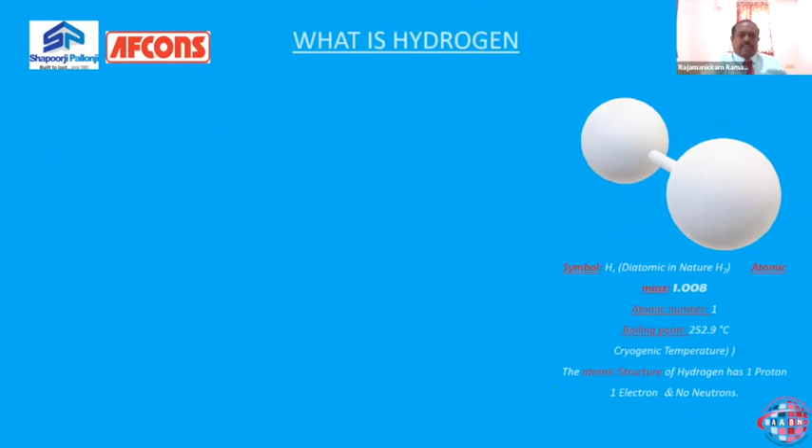If you look at it, hydrogen is a colorless, odorless, tasteless, non-toxic, and highly combustible gas. Being colorless, it is a little bit dangerous - it's not seen by the naked eye. It will escape during leakage paths, but we won't be noticing. And sometimes with the blue flame, even the flame is not visible. It is odorless, totally tasteless, and non-toxic, but it is a highly combustible gas. So that is the risk associated with hydrogen.

Basically, the sun is a giant ball of hydrogen, and H2 is the lightest element on Earth. About 11 liters of hydrogen gas weighs only 1 gram, and needs 11 cubic meters of volume for 1 kg of hydrogen gas - that's the density basically. It has high energy content, 120 megajoules per kg. The energy content is high by weight, but by volume it is low because it is less dense. Per kilogram of hydrogen gives 33.33 kilowatt hours, which is a unit of electrical power - so 33 or 34 units of power can be derived from 1 kg of hydrogen.

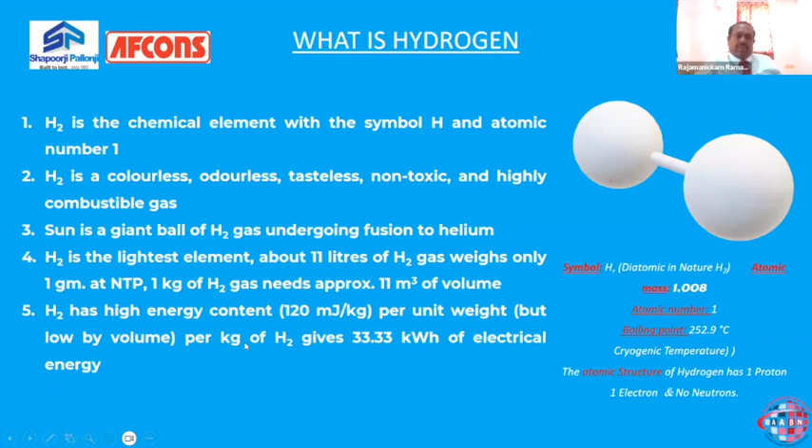So now we come to the topic after getting the properties: why hydrogen fuel? Everybody is talking about hydrogen now. They are all talking about renewable energies, and hydrogen occupies a very important position in the renewable source now.

Hydrogen has no direct carbon dioxide emission because the element hydrogen doesn't contain carbon, or any other greenhouse gases it emits, except some traces of nitrous oxide (NOx) which may be emitted, and that is due to heating of air, not inherent. No carbon dioxide is burnt, only hydrogen - it is a clean fuel. That is why the reason for us to go to hydrogen is it doesn't emit any gases which are harmful to the environment, including greenhouse gases.

Greenhouse gases are those gases like nitrous oxide, NOx, carbon dioxide, water vapor, and these gases absorb the heat radiation from Earth and remain in the atmosphere, increasing the atmospheric temperature. So the Earth's atmosphere is getting warmer day by day due to these greenhouse gases emitted by our usage - industrial use, vehicular transport, shipping transport, train - everything emits from fossil fuels.

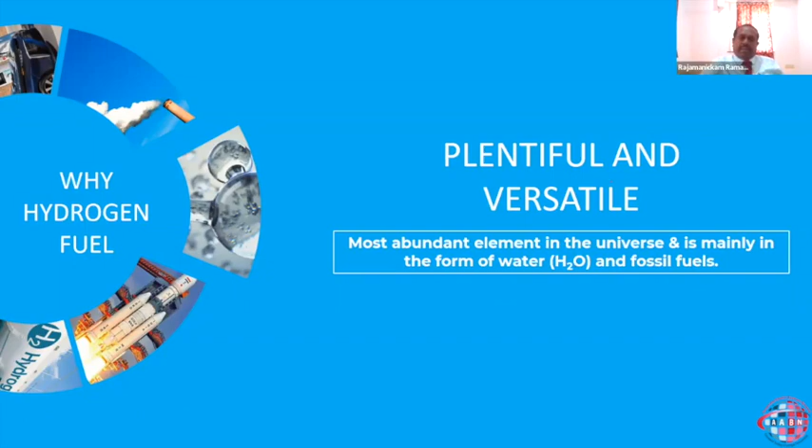Hydrogen is plentifully available on Earth, mainly in the form of water, and it is abundant in fossil fuels also. So it is because of plenty availability that we prefer hydrogen fuel.

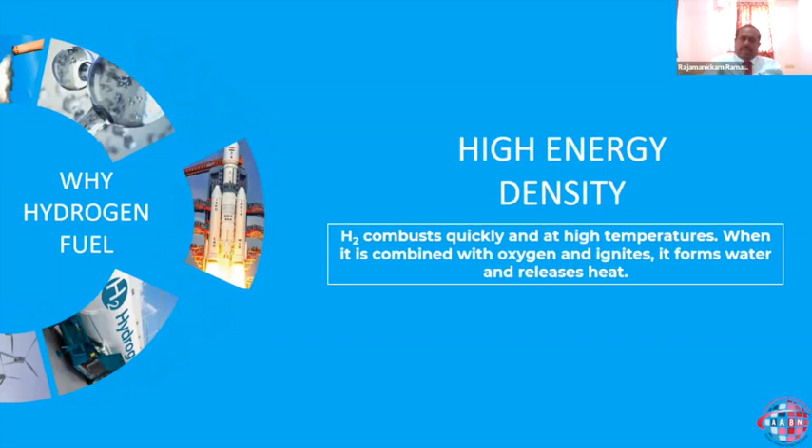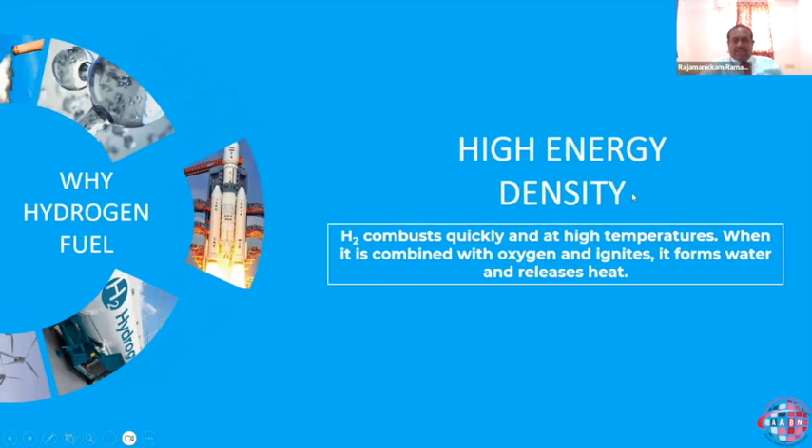It also has high energy density. When it ignites with oxygen, it forms water and releases heat. The energy density is high with respect to mass, but not with respect to volume.

Hydrogen can be produced and stored, but used anywhere, and no extended use is expected. You can use it any time, store it as long as you want. Not like electrical energies - when a windmill is running, you have to tie to the grid for usage, or you have to store it in batteries, so the efficiency reduces. In hydrogen it is not the case - storage can be done. It can be stored for long periods without any significant losses.

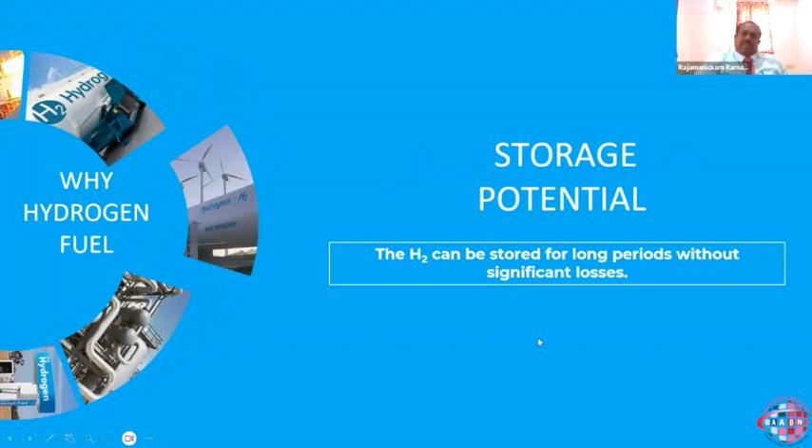It is an industrial fuel. Many industrial processes use fossil fuels and develop carbon dioxide, emitting greenhouse gases. So to replace them, hydrogen is the clean fuel which can be used.

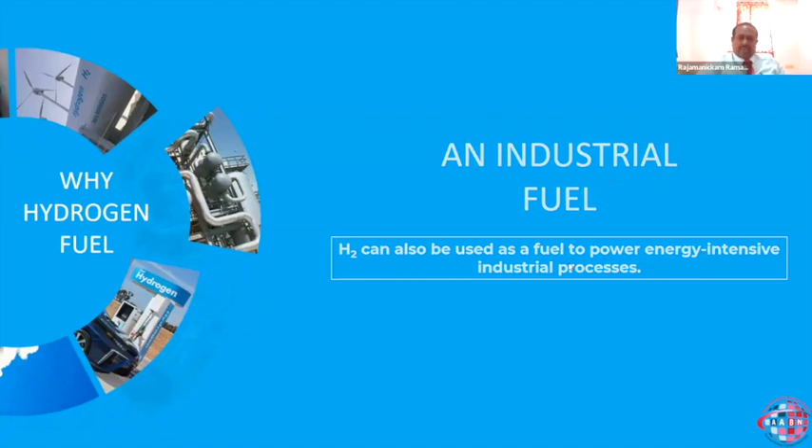Now the fossil fuel reserves in the world are depleting day by day. Saudi Arabia has one of the largest reserves, even they are getting depleted. Many reservoirs in Malaysia have already been closed, and of course many reservoirs are being discovered also. So it is because of the diminishing storage of fossil fuels on earth, we still need to find a way to run our business on earth.

So we need another alternate energy. Hydrogen seems to be a promising energy of the future. Coal as well as natural gas - all these supplies are fossil fuels, and they are getting depleted.

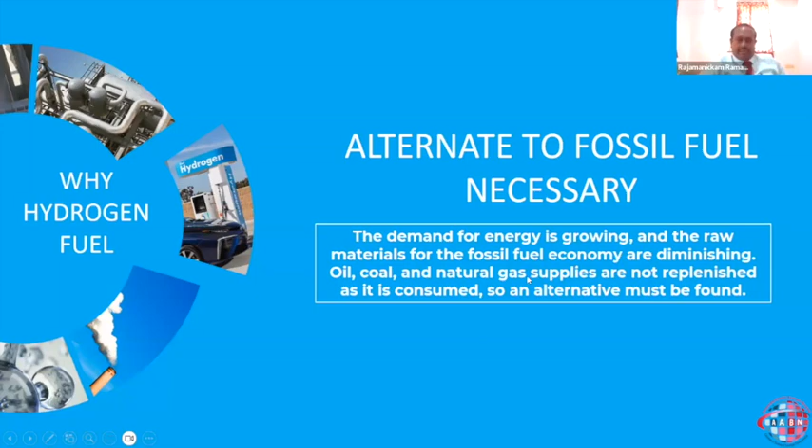Now, the reason for me to say why we go for hydrogen - we have seen some certain factors why we need to go into hydrogen energy. Now there is another big reason why we are going in.

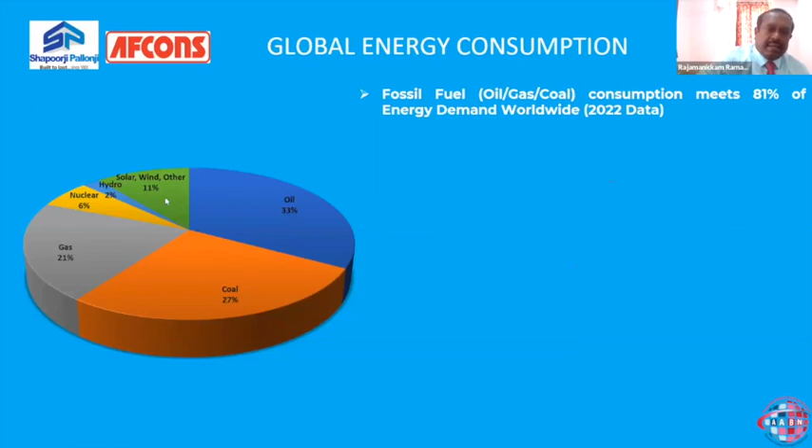If you consider fossil fuel consumption, it goes up to 81% of the world's energy demand worldwide. This is 2022 data from IEA. Other renewable sources only meet 11%.

Fossil fuels are also not a clean fuel, and they induce global warming, glaciers melt, so many issues come. The hydropower from dams provides only 2% of the energy demand. It is the most cleanest energy.

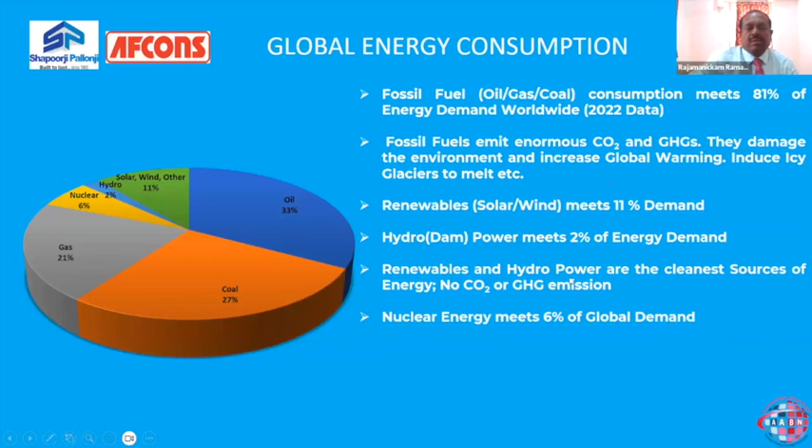And other renewable sources are also there - in renewables we have solar, wind, as well as hydropower. We have nuclear power also, which meets 6% of the global demand. Nuclear energy is clean from carbon dioxide or most of the GHGs, but it produces a lot of radioactive waste that is toxic to humans and harmful to them for more than thousands of years.

Basically, in the world, no country has made an innovation yet to break this silence on how to manage the radioactive waste. They have been dumping it by drilling into the earth too long and then dumping and sealing it, but nobody knows what really we can do. Research is still ongoing on the nuclear energy path.

And why we may not be able to go for solar also sometimes is because we need a bigger land area - like 2.3 to 2.5 acres required to generate 1 megawatt of solar power. These challenges in solar power are still there. Research is ongoing to improve the efficiency of solar power extraction.

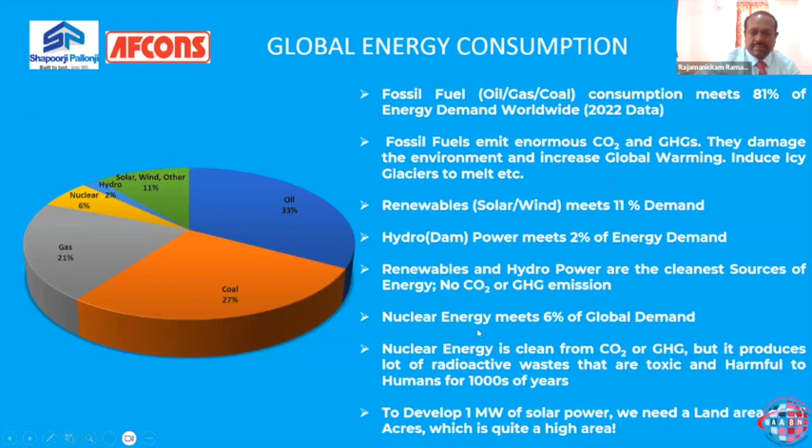So another reason for us why we are going for hydrogen power is the Paris Agreement. Global warming happened, and the climatic change conference happened in Paris in 2015. At the end of the conference, they drafted a legally binding international treaty that applies to almost all nations of the world, around 196 nations. What they say is all nations pledge to reduce carbon and greenhouse gas emissions so that we hold the increase in global average temperature to well below 2 degrees above the pre-industrial levels.

Pre-industrial levels are defined from 1850 to 1900 AD, the period where industrialization had not started. The global nations have to keep the global average temperature well below 2 degrees of the pre-industrial level, and pursue efforts to limit the temperature further to lie below 1.5 degrees. This 1.5 is an ambition, but the requirement is 2 degrees for any nation. With this stringent condition, it is difficult to continue with fossil fuel emissions.

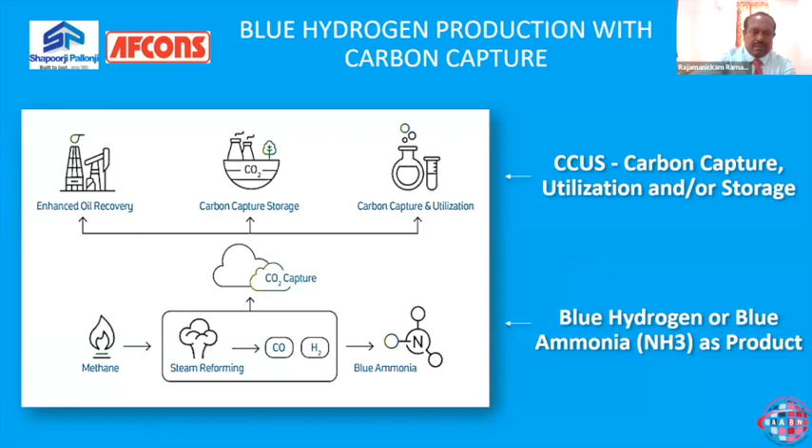Blue hydrogen can also be used to produce blue ammonia. Ammonia is made of three hydrogen atoms, NH3, so it requires a lot of hydrogen. These are the blue hydrogen technologies under development in the Gulf.

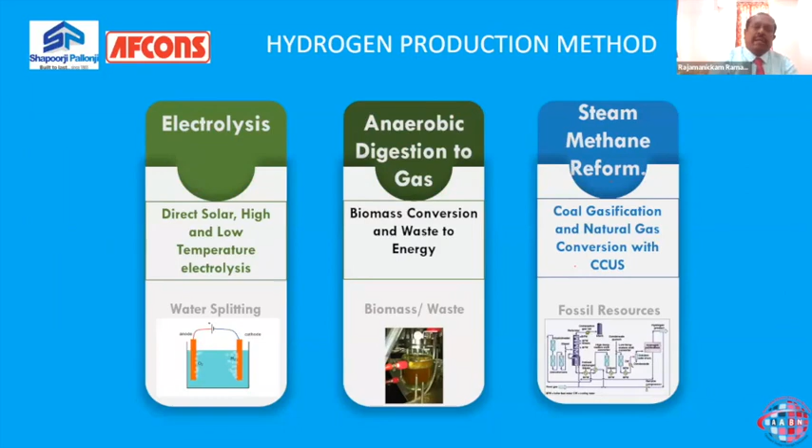So the different methods of producing hydrogen are written here. Hydrogen production mainly is done in the world most popularly by means of the steam reforming method - the highest amount of hydrogen is produced by steam reforming. Then you have coal gasification also, then electrolysis, which is now gaining more momentum. Green hydrogen comes from electrolysis because it doesn't emit any carbon dioxide.

So it is pure. We also have another kind of green case - biomass waste is utilized, burnt, and natural gas produced from it is called renewable natural gas, RNG. RNG is again converted using the steam reform method into hydrogen. For conversion of biomass, we may use anaerobic digestion, where bacteria that don't see oxygen at all, in a covered environment, break down the organic compounds of biomass into natural gas.

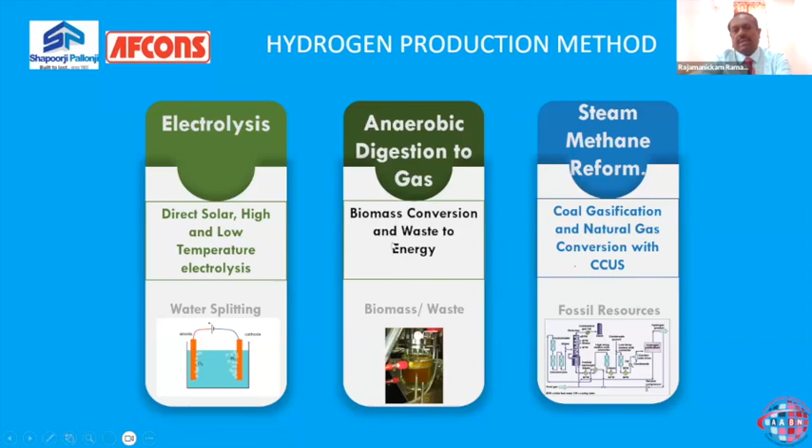So the main method of hydrogen production for green hydrogen is the electrolytic method—just the simple electrolysis process we have studied in chemistry.

There are two elements called anode and cathode. The anode is the positively charged terminal, and the cathode is the negative terminal. A membrane separates them, which can be an ion conducting media, and the electrolyte is also an ion conducting electrolyte—the solution you can see there.

Mostly the solution is salt water or some other acid. What they use mostly is salt, NaOH, a 30% solution also being used. So this electrolyte conducts the ions through the membrane.

When we pass electricity from a renewable source like wind power or solar power, then it is called green hydrogen—that's what we have seen earlier. So green hydrogen production is from a renewable source like wind or solar power. You need a power supply in this electrolysis process, and that power supply should come from solar or wind; then it is called green hydrogen. With that, you generate green hydrogen using an electrolytic cell like this.

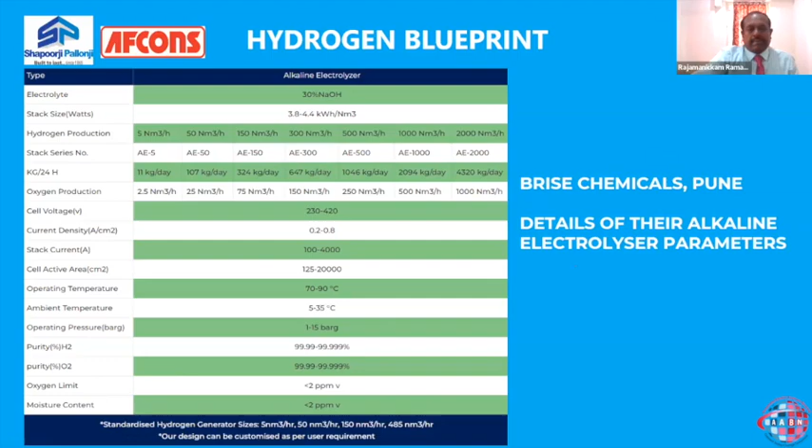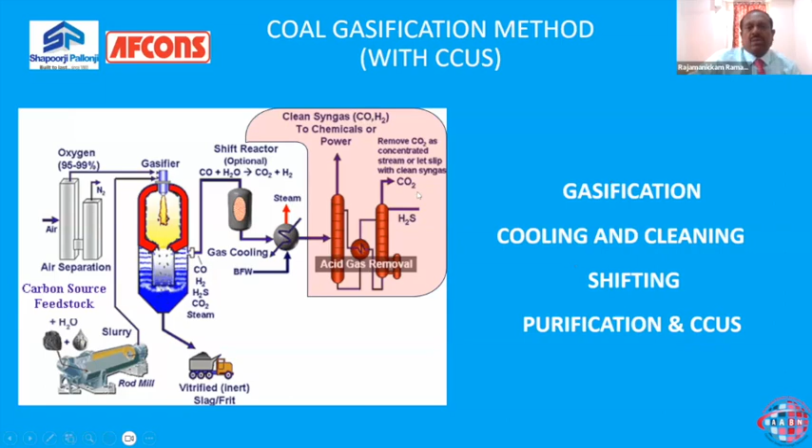It's called PSA in chemical terms. With pressure swing adsorption, basically a solid carbon powder like activated carbon, they pass the gas through it, and it removes the carbon dioxide. That is separately separated out and removed as part of CCUS. Unless CCUS is done, the hydrogen produced from this process is not termed blue hydrogen—it will be either gray, black, or brown. That is why we need to do carbon capture and storage safely; then the hydrogen is classified as blue hydrogen. Basically, we are trying to prevent the environment from carbon getting diffused into it, because carbon is harmful to the environment.

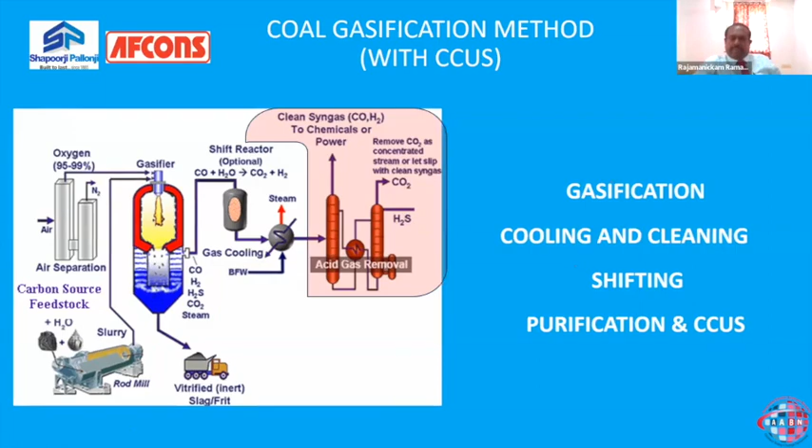So the second method is the steam methane reforming method. Here, methane gas from natural gas, mainly comprising methane, is passed into a cylinder wherein steam is also injected. With the steam and methane together, the reaction is endothermic, meaning it absorbs heat for the reaction to proceed. So reactant becomes product through assistance of heat, and we supply heat through steam, producing carbon monoxide and hydrogen, as in coal gasification.

Then the second part of the reaction is called the water gas shift reaction, wherein the carbon monoxide product is treated with hot steam, and it separates into carbon dioxide and hydrogen, also emitting a small amount of heat. So this reaction is exothermic because it emits heat. This is the process of the steam reforming method.

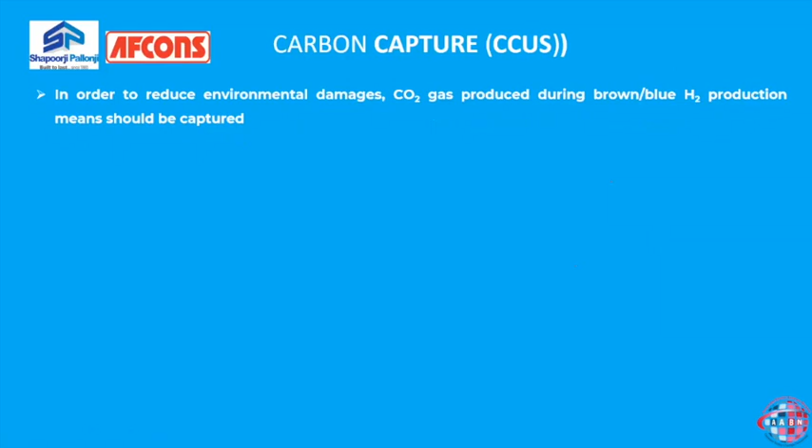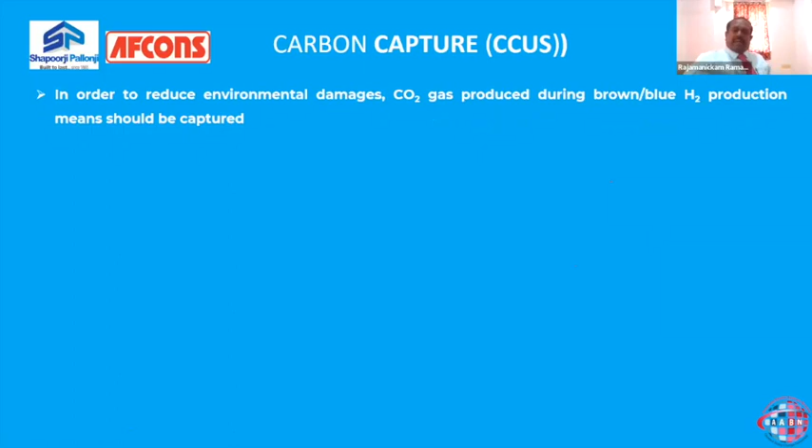So next is carbon capture, what we have been talking about, CCUS. In order to reduce environmental damage to the atmosphere, carbon dioxide gas produced during blue or brown hydrogen production has to be captured. And how do we capture it? There are two methods: you can either utilize the carbon dioxide, or you can capture it in drums and later store it into reservoirs. We will see about such a detailed method shortly.

There is a method of utilizing the carbon dioxide also. Many companies started researching how to utilize the carbon dioxide produced. Basically, they are trying to form carbon-based products, building materials, chemicals, etc. Many research institutes and companies like Saudi Aramco are in a big way trying to utilize the carbon instantly rather than storing it.

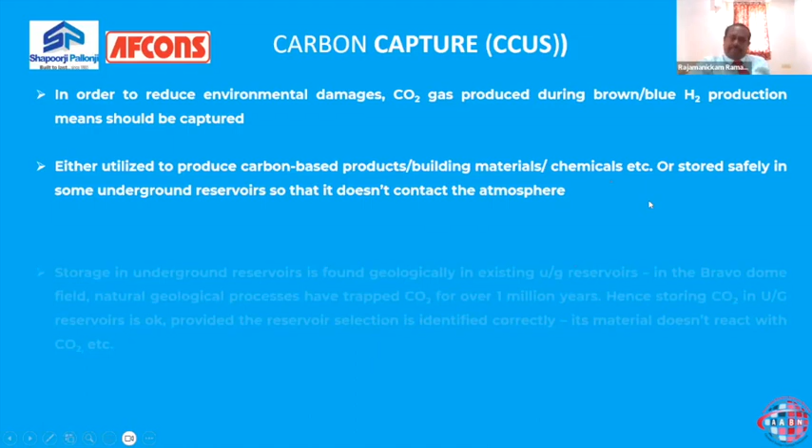So carbon dioxide can also be stored safely in underground reservoirs so that it doesn't come in contact with the atmosphere. We will see that later. Storage in underground reservoirs is found geologically existing. There is already carbon dioxide naturally occurring under the reservoirs below Earth. The rock traps the carbon dioxide in the geological condition below Earth, and it is already existing naturally.

This phenomenon gives rise to researchers thinking that the extra carbon dioxide produced from all these processes can be injected into a geological formation, a reservoir, and sealed so that it is safe for the environment, as well as satisfying nature, because naturally occurring carbon dioxide is already found trapped below reservoirs for over 1 million years. For example, the Bravo Dome field in the US, where natural geological processes have trapped carbon dioxide for over 1 million years already. So it is not new that we are trying to inject carbon dioxide into the ground; it is already a natural process that exists.

So whatever carbon dioxide we produce from all these hydrogen making processes, we can think of injecting it into such reservoirs in big volumes. Because if you store carbon in containers, think how many containers you need and the energy required to produce them, and so much cost is involved. Whereas you simply drive it into the earth and trap it into the reservoir, seal it, and you must have a framework to monitor and control them. Reservoir control management should be there.

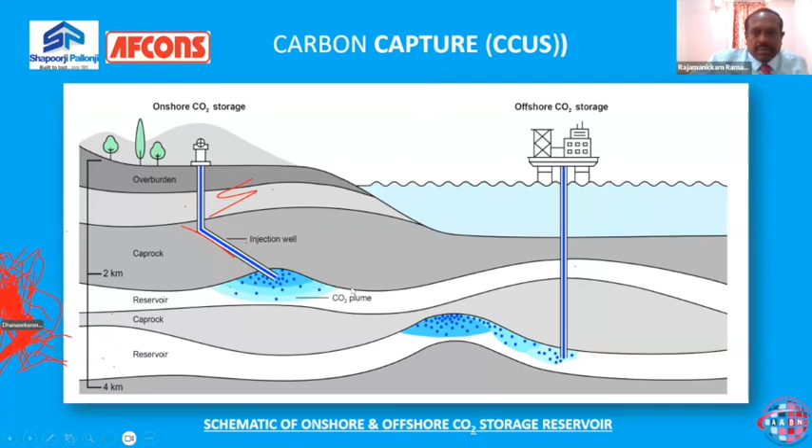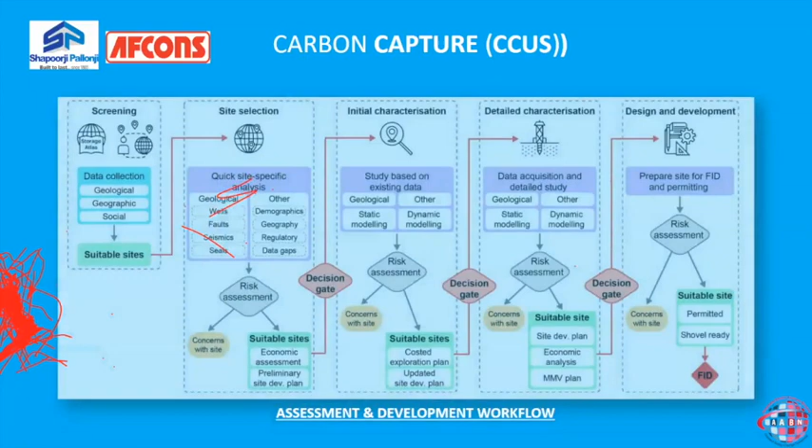So in the carbon capture framework, we have this workflow.

Can someone stop marking on the board? Dhanasekaran, well, he has been given access. Yeah, he has not been given access, right? Gopi, given access, he's not been given access. Then okay, how is he writing? PS, can I just correct it, PS? Okay, so let me proceed further.

Based on the selected site and geological data, they will do the modeling and assess the risks of storing in those areas, whether any leakages would be possible, or any nearby reservoirs would get disturbed. So those things they will study.

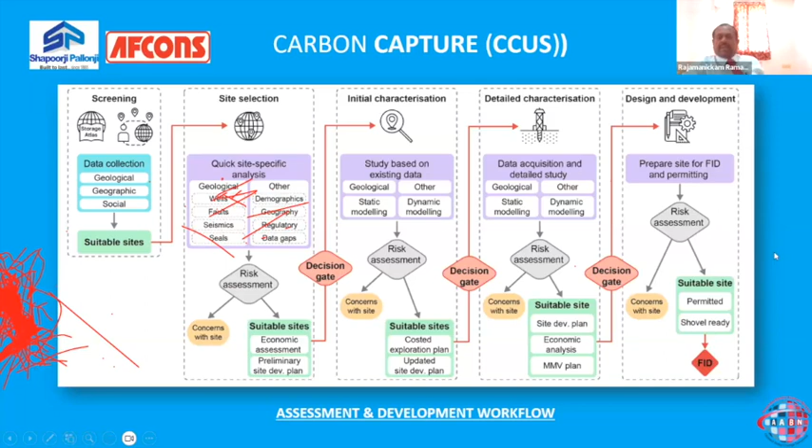This risk assessment is done finally before the FID. FID is the final investment decision for any project. So before that, they will do proper design as well as risk assessment. So this completes the framework for a carbon capture site selection, basically.

And this is the workflow involved in it. It's a big area of research going on. Each topic in hydrogen research is not fully matured. It is all going on in those areas until we get success one day. A lot of challenges are there. I will highlight them, and anyone interested can further pursue research. So a lot of opportunities also exist.

So reservoir management software would be there. That reservoir management software would require a lot of field instruments installed in these wells, and they will monitor from DCS systems with the reservoir management system software over a period, because it has to be kept under control.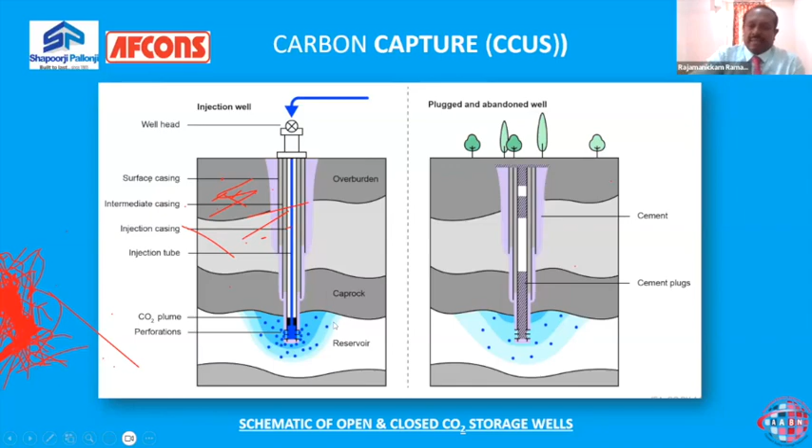So above which you can still grow greeneries and things. So this is an abandoned well, whereas the first one is an active well, where enhanced recovery and oil depletion things are there.

This is the monitoring I was telling you about just now, measurement and monitoring of the wells which are already drilled, and enhanced oil recoveries are made by pressurizing carbon dioxide inside. Basically, the monitoring program of the injected carbon dioxide into the reservoir, the carbon capture, they have all this data: reservoir properties, site and locations. Then monitoring phases will come where pre-injection, before injection, during injection, post-injection, all the measurement data are collected, as well as monitoring items.

They monitor for the plume, checking the environment above the well for any CO2 gas leaked from the reservoir. Many monitoring checklists exist after carbon capture is done. You can see some of these in the last column: top seal integrity, overburden monitoring, reservoir monitoring, seismicity, and other things.

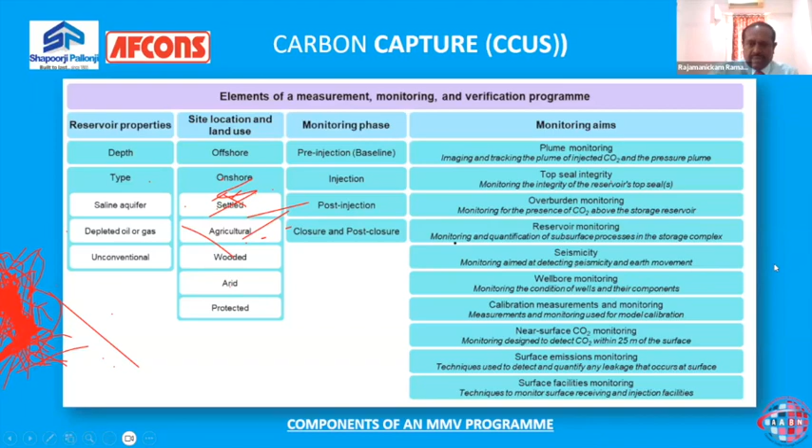So carbon capture itself is a very big field going on presently. Now that we have seen how we capture the carbon dioxide produced, we will now see how to...

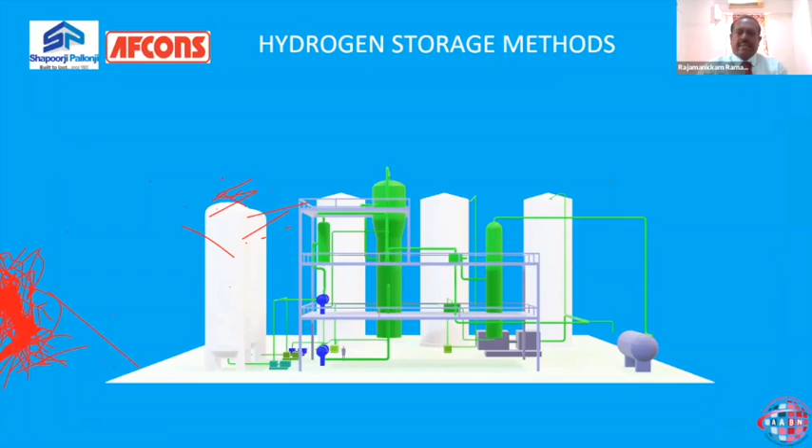Store hydrogen, storage solutions for hydrogen. The produced hydrogen gas is mostly in gaseous form, and to make it into liquid, we have to cool it down to minus 253 degrees centigrade, which is an absolutely very low temperature. Achieving such temperature requires a lot of challenges - it's the cryogenic temperature.

Achieving and maintaining the cryogenic state itself involves big research going on in many institutions. Basically, in space research, cryogenic engines are being used. India started developing a cryogenic engine for hydrogen in the year 1994. They were successful in testing the hydrogen cryogenic engine.

In 1994, they decided to develop a cryogenic engine indigenously in India. In 2003, they successfully tested the cryogenic engine. And in 2014, they successfully launched a rocket with that indigenously produced hydrogen cryogenic engine. So it took roughly 20 years in a big space agency where only government control exists. You can see two decades gone, even with full government control and support, to reach maturity in the research and get success in a project.

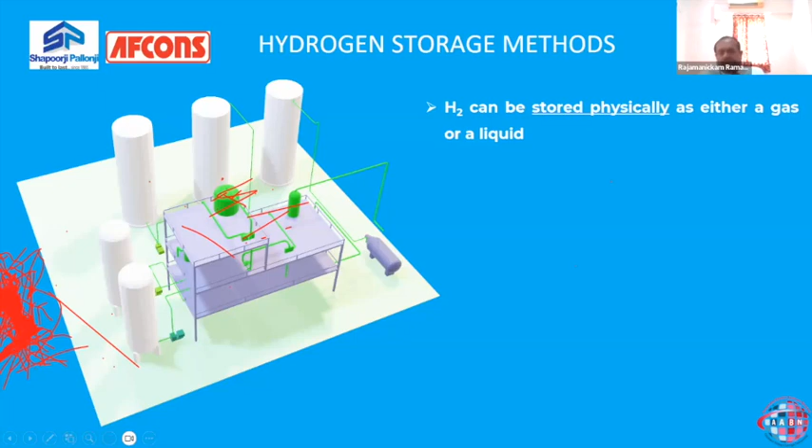A lot of research has gone through, and many companies have already succeeded. Many hydrogen-powered trucks are already on sale commercially, and many cars are also on sale. They are running everywhere, except in India. In China, if you take it, there are 250 hydrogen filling stations.

Whereas in India, we are talking about one or two only. So vast expansive growth is there in China. And China is the number one producer of hydrogen until now, not even the United States.

Now, coming to the storage method, it can be stored either as gas or liquid, as I said. If you store it as gas under a high pressure tank, you can store a good volume of hydrogen. High pressure tanks are normally built in the range of 350 to 700 bar, which is roughly 5,000 to 10,000 psi. With this pressure, hydrogen can be stored in a partially compressed state.

Then, hydrogen cannot be fully compressed to make it liquid form - you definitely need low temperature. As you know, the boiling point of hydrogen is minus 252.8 degrees centigrade. To achieve this itself is a challenge.

Hydrogen can be stored on surfaces. This is new research going on through a process of adsorption. Adsorption is a process by which you fill the voids between solids by thrusting gas into them. Some kind of chemical attraction or affinity is also required to keep the hydrogen gas entrapped in such solid voids. So they are trying some metallic oxides and metallic hydrides as solids for adsorption.

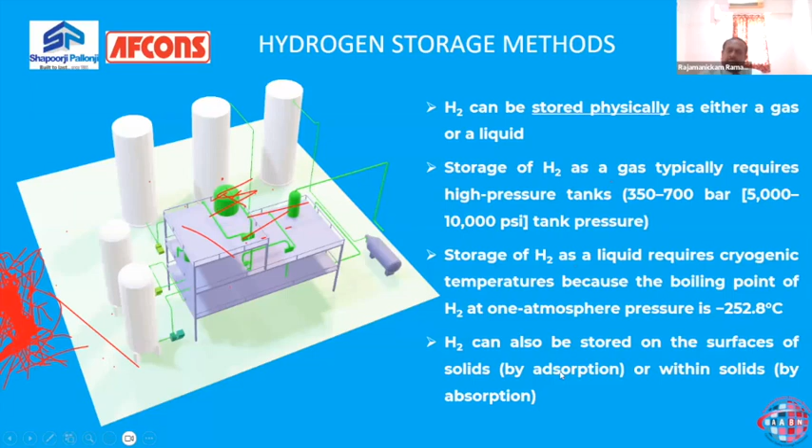This method of storage of hydrogen is a very big area. Research is going on in the United States, and some of them have gotten success with some oxides.

So these are the methods I was telling you about, the physical method of storing hydrogen by means of compressed gas in tanks, or both lowering the temperature and compressing to achieve some efficiency in storage. And liquid hydrogen is at a very low temperature, in the cryogenic state. So these are the physical methods.

And the last one, adsorption in solids, the voids in solids, that is the material-based storage of hydrogen, wherein adsorbents are used: some liquid organic method, interstitial hydride chemicals, and complex hydride method, chemical hydrogen. All these methods are being researched to store hydrogen efficiently.

But I believe storage in solids would be slow because the voids are not aligned in one line. The hydrogen has to travel a random path to enter the voids, and that not only slows down the rate of storage, but may also limit the amount, because the voids may not be so numerous. But in compressed state it can be possible, or at lower temperature, or with some chemical reactions, some innovation may be possible. So research is still going on in this field.

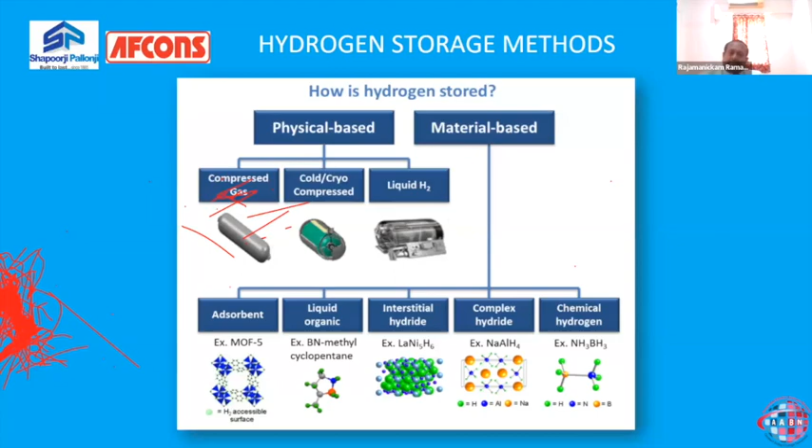And here most of them are double walled, that means inner wall and outer wall. In space research stations, they have very big spherical tanks, not this cylindrical type.

It would be spherical, in a very big area, in space rocket launching locations in NASA or in India, everywhere. So those hydrogen storage tanks are spherical with a double wall again: an inner wall and an outer wall, both spheres, and in between they create absolute vacuum so that the low temperature is not transmitted through it. That is the storage mechanism adopted at launch stations.

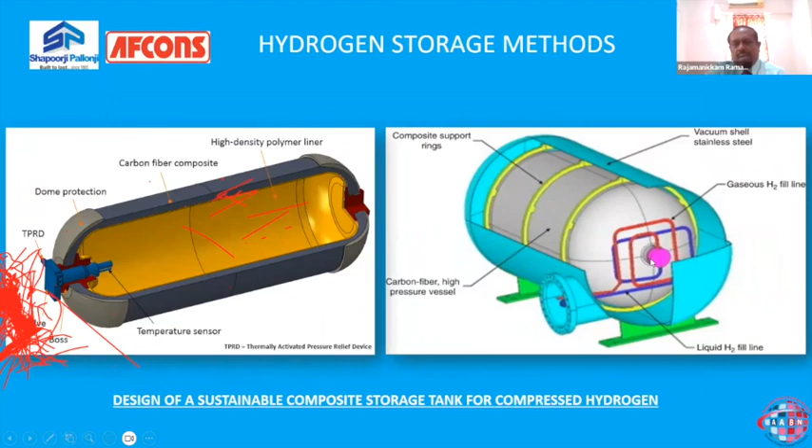The storage. This is the hydrogen storage tank they are developing for aeroplane.

Airbus in France is developing this for a new Airbus that would run on hydrogen. What they are saying is it would run on hybrid fuel, having conventional fuel as well as hydrogen separately, so that in case of any emergency they don't want to take risk.

So this hydrogen powered Airbus aircraft is under research and development. You can see the hydrogen storage solution here is a big tank with outer wall and inner wall, with a suspension mount, and pipes for heating, refueling and extraction. So the piping and assembly also poses a challenge, because hydrogen transport and conveyance is still under good research.

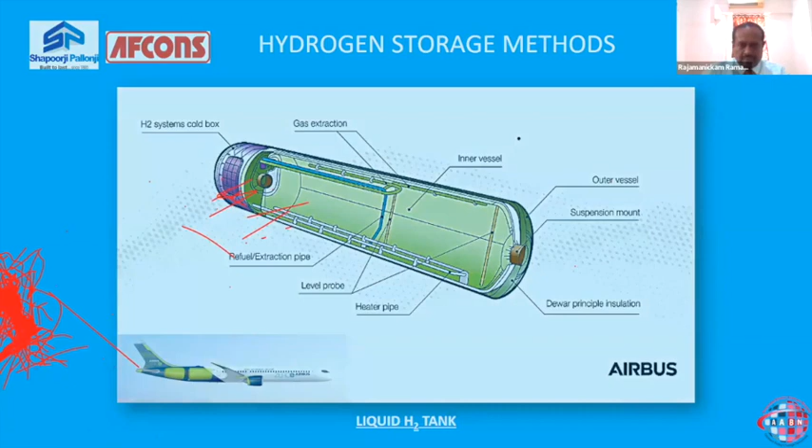So we have the fuel cells. Now we come to how to use the produced hydrogen, the application method. In this application method, we can have different types of mechanisms by which we can utilize the produced hydrogen. One is the very common method, which is called a fuel cell.

It is used in electricity generation. The input is just hydrogen and oxygen, both gases, in the fuel cells, and they produce heat, and water is the byproduct. The fuel cells are of different types. They have SOFC, MCFC, we will see later. These are mainly used in vehicles and buildings.

Fuel cell research has come out with so many fuel cells, either alkaline type or proton conducting type. So we will see one by one later.

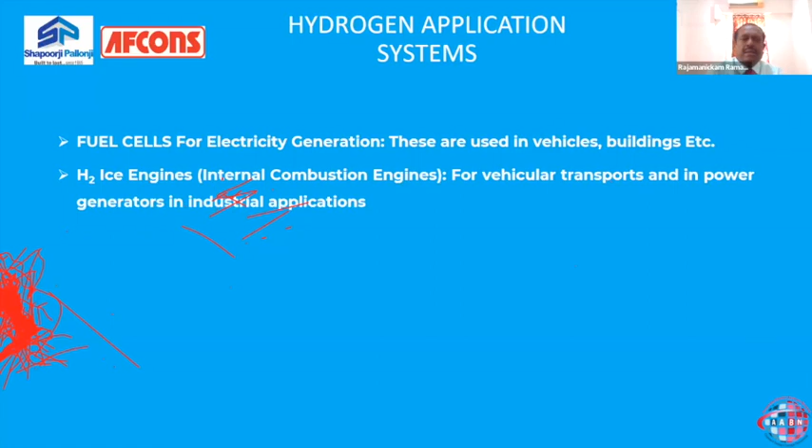Then internal combustion engines are also being developed for hydrogen, especially by the company Cummins in US. They have already patented a few internal combustion engines, and they have also made a truck using the internal combustion engine using hydrogen. It is simply like our normal combustion engines, except the fuel would be hydrogen, and other parameters are different, and seals need to be very tight here.

As I told you, hydrogen is the lightest element on earth, having atomic number 1 and molecular weight 1. Being the smallest element, size also very small, it will easily leak through the seals of engines or turbines. So a good amount of research is undergoing on how to control the leakage of such a small element like hydrogen. Whereas natural gas, which is methane, has molecular weight 16, so it's 16 times bigger.

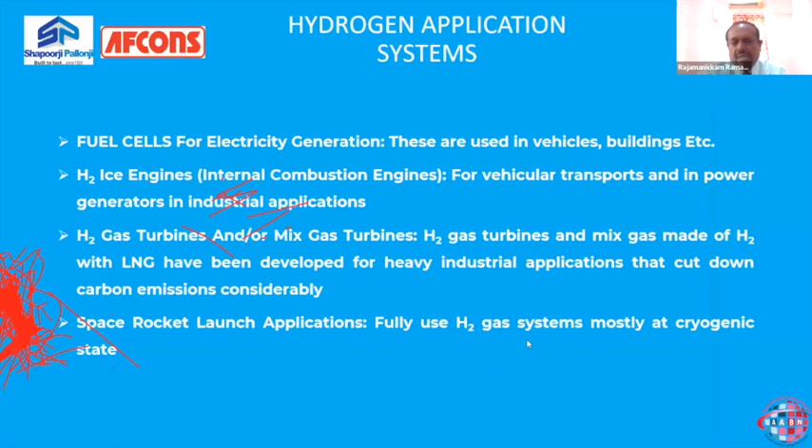Water is the byproduct because water is produced by mixing hydrogen and oxygen. As I said earlier, in space stations they use hydrogen, and they also use fuel cells. In one of the US spacecraft, the Apollo Command Module, they used a sort of alkaline fuel cell, specially designed.

In that cell, by injecting hydrogen and oxygen gas carried in the spacecraft into the fuel cell, the fuel cell gives them electric energy which they use for spacecraft operations. Not only does the fuel cell give electrical energy, it also gives out water, which they use for drinking purposes of the astronaut crew. So it serves a dual purpose in the spacecraft - they take both electrical energy output as well as water produced from the fuel cell, using it for drinking purposes of the astronaut crew or other washing purposes within the spacecraft.

Application of mind is required wherever we see such kinds of innovations, to increase efficiency and find more uses. So innovations are required in all fields, especially in new technology areas.

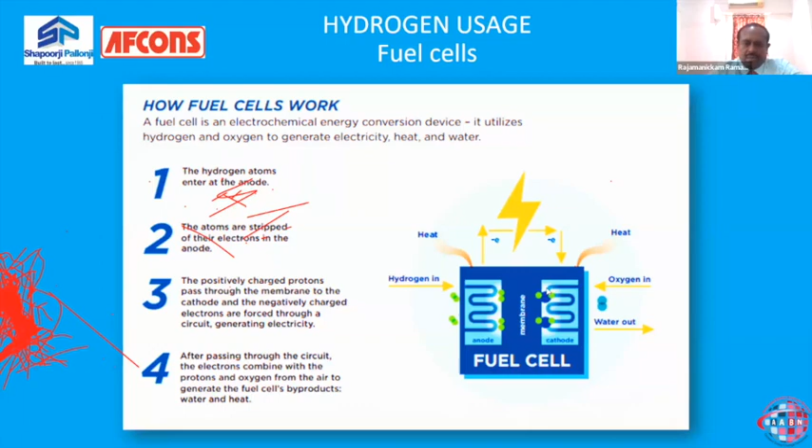Different fuel cells for different intended purposes are available now. You can combine fuel cells and stack them together. One fuel cell normally produces 25 to 100 watts of power, so if you combine 10 fuel cells, you get roughly 1 kilowatt. A big stack would be capable of providing about 50 to 100 kilowatts each, and if you combine all of them, you get 1 megawatt easily in one row.

This is the solid oxide fuel cell, one type. It is made of a dense ceramic layer inside the electrolyte, and it conducts oxygen ions. The electrolyte must conduct oxygen ions, which is the characteristic of electrolyte in an electrolysis process. They operate even at very high temperature, up to 1800 degrees Fahrenheit, because hydrogen is highly combustible and enormous heat is released. That is why you need a dense ceramic layer, since ceramic is a good insulator of heat.

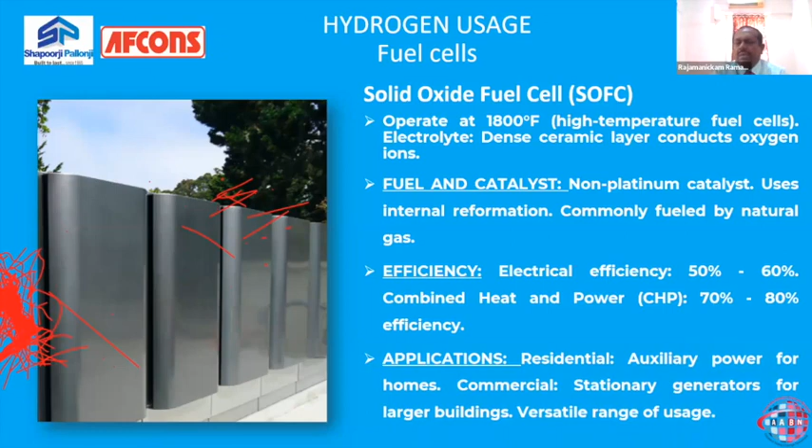The efficiency of these fuel cells is 50 to 60%. With combined heat and power, that is, when you reuse certain flue, the process is called combined heat and power. With that, you can achieve up to 70 to 80% efficiency in solid oxide cells. It is mainly used in residential, commercial complexes, and mainly as a stationary generator. It cannot be a mobile type for this case.

Then comes molten carbonate. Here the electrolyte is a ceramic matrix with molten carbonate salt mixture. You can change the electrolyte, the anode type, cathode type, and operating temperature - these are parameters they change and do sensitivities on in research, coming out with different fuel cells. This molten carbonate fuel cell has efficiency of 50 to 60% again, and is also applied in stationary applications, either in commercial or residential buildings, storage areas, and warehouses.

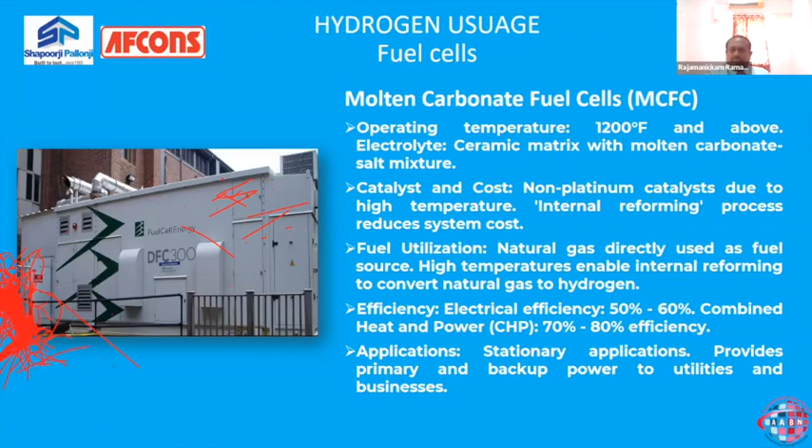Another type is the proton exchange membrane fuel cell. Here there is a polymer membrane, and typically it's made of platinum inside. The catalysts are platinum, and these fuel cells operate at cooler temperature only, 80 to 200 degrees Fahrenheit, because platinum is a very costly metal catalyst and operates at better efficiency at low temperature.

This type of cell has an efficiency of 40 to 60%, and they handle very rapid power output changes. So the power generation is very rapid here, and it is applied in vehicles like cars, forklifts, wherever quick startup acceleration is required, and also in telecommunication data centers. Nowadays research is ongoing to change the platinum to non-platinum, and with non-platinum, many patented proton exchange membrane cells are available, used in these cars and data centers, etc.

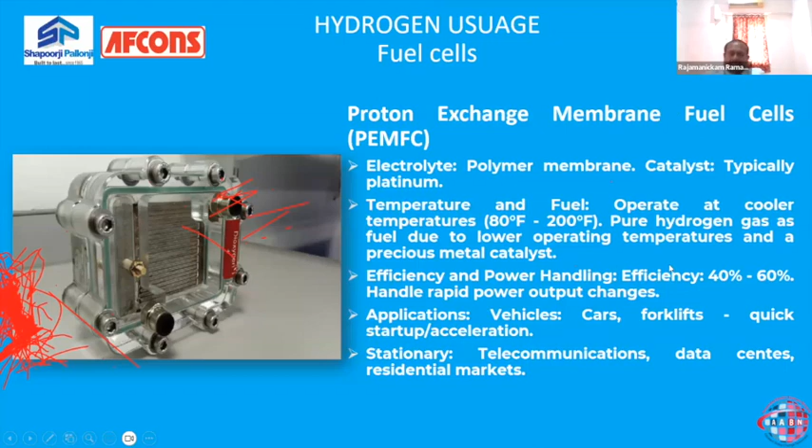Now coming to the internal combustion engine, in the USA, Cummins have developed this internal combustion engine called B6.7 ICE, and this operates seamlessly on hydrogen fuel. It is suitable for even trucks with 10 to 26 tons gross weight, and has an impressive rating, roughly 290 horsepower, and can give up to 1200 Newton meter peak torque.

And it employs advanced 700 bar pressure, high capacity hydrogen storage, which I told you is type 4, with HDPE polymer membranes with carbon fibers. It is fully made of polymer and carbon fibers. So the combination of this hydrogen storage solution is a bit costly.

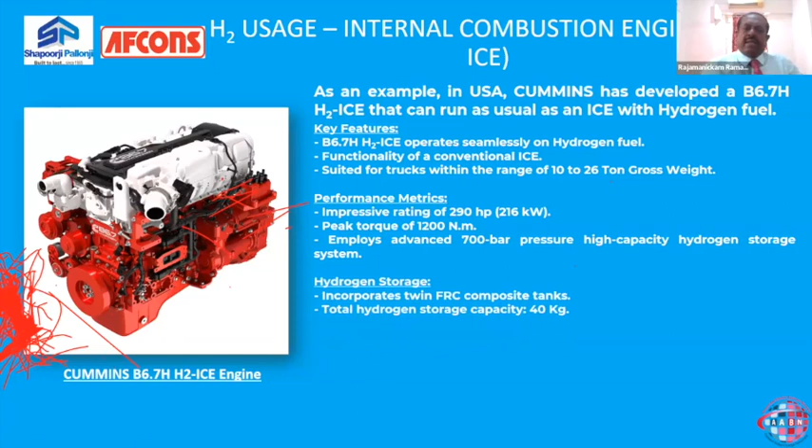They developed a truck also later with this engine. That truck incorporates fiber reinforced concrete composite tanks, 2 numbers, each having a capacity of 20 kilogram hydrogen, so the total storage capacity is 40 kg. With 40 kg, the range at which the truck can go is around 500 kilometers. You can see the truck in the next page.

So they have developed this truck with twin fiber reinforced concrete hydrogen storage tanks, one on this side and one on the other side, cylindrical ones. Each containing 20 kilogram hydrogen, and the engine is in the front portion, the hydrogen internal combustion engine they developed. Cummins have developed it indigenously, and it is a successful one.

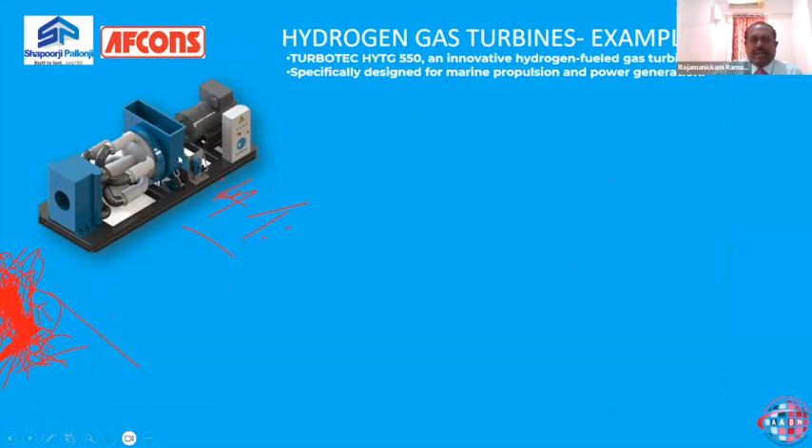Now coming to the gas turbines, hydrogen gas turbines, Turbotec in Belgium, a company by name Turbotec, they have successfully developed hydrogen gas turbines, purely hydrogen gas turbines without any mix with natural gas. This gas turbine is called their innovative model HYTG 550.

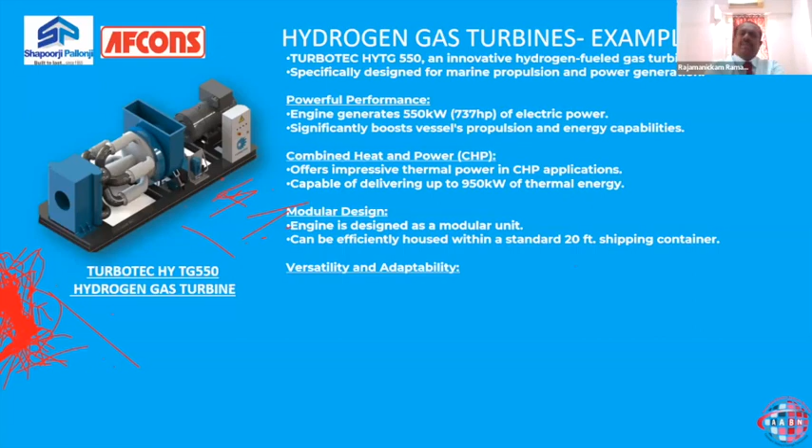This gas turbine is used for marine applications in ships where you require huge power. Turbines are normally used where huge power is required, like industrial applications, mostly in steel producing mills. If you use fossil fuels like petrol, diesel, coal to produce huge power, huge amount of carbon dioxide you will be releasing. So in order to control them, the steel mills as well as marine ships...

So many container ships, ship transport is going on in the world. If all of them emit so much carbon dioxide, so many industries emitting this for huge power, huge amounts of billions of tons of carbon dioxide already occupy the atmosphere. So in order to reduce them, we have to use clean fuel like hydrogen. Purely hydrogen gas turbines are a big boon to the industry.

Many companies have developed these, not only Turbotec, many companies have developed successfully hydrogen gas turbines, like Mitsubishi, GE, and a few other Japanese companies also. But pathetic state in India, nothing has been done yet on hydrogen gas turbine. Still on research and development, even though we have so much IT resources and supply chain resources, the innovation, development, creativity to succeed and perseverance to follow up is not there still. We need to improve on that.

So this hydrogen engine, what they have designed here, generates 550 kilowatt, roughly 737 HP of electric power, and it significantly boosts vessel's propulsion and energy capabilities with this power.

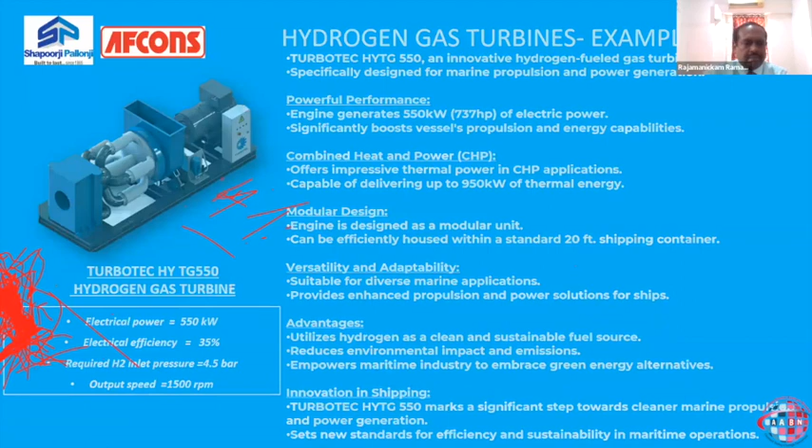Turbine design is not simple. Many of you mechanical engineers would know a turbine is a blade with rotor. You can see in the next page. Yeah, this is the rotor blade inside the turbines.

The shape of the blade, for determining the shape of the blade, you have to run computer analysis using CFD. CFD is nothing but computational fluid dynamics, the fluid, how it interacts with the walls of the rotor blade and pushes them and compresses them in an optimal way to get highest efficiency. So we have to see that objective, that it utilizes the fluid to push it to the highest efficiency. So that kind of rotor design, we have to get it done using computer programs like computational fluid dynamics.

Using that pathway, a lot of softwares are available for CFD, and running CFD itself takes weeks and weeks of time. Now with supercomputer, it will take even few days. So it is not simple to design the turbines, and there is no Indian manufacturer designing such novel turbines or rotor blades, and we are mainly lacking in this area. This is mainly required for aircraft industry, industrial power generation, marine propulsion, and so many areas. So turbo engines are not as easy as internal combustion engines, and they are highly complicated, and a lot of challenges are there in turbo engines or turbines.

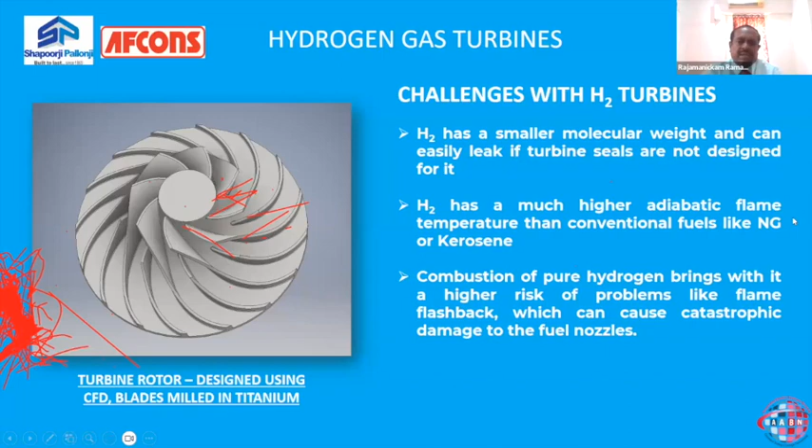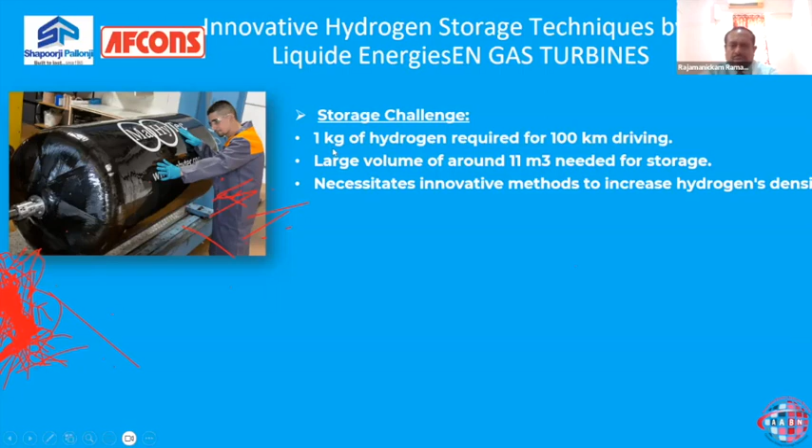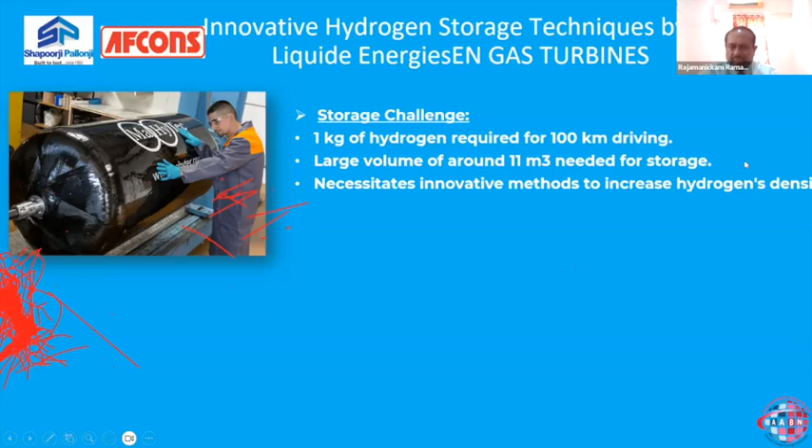Now we have completed the application part of hydrogen. Let us come to the area of storage challenges. How do we store enough for so much mileage range? 1 kg of hydrogen is required for 100 kilometers of driving, and as I already told you, a large volume of around 11 cubic meters is required to store 1 kg of hydrogen. So all this requires different storage solutions, and different storage volumes are being tested.

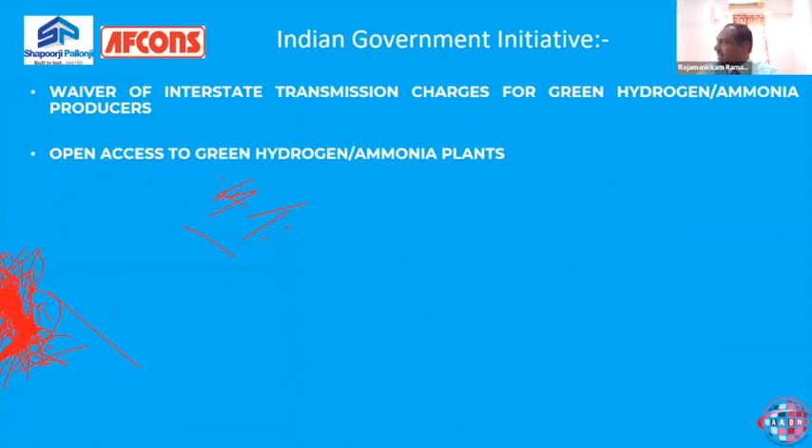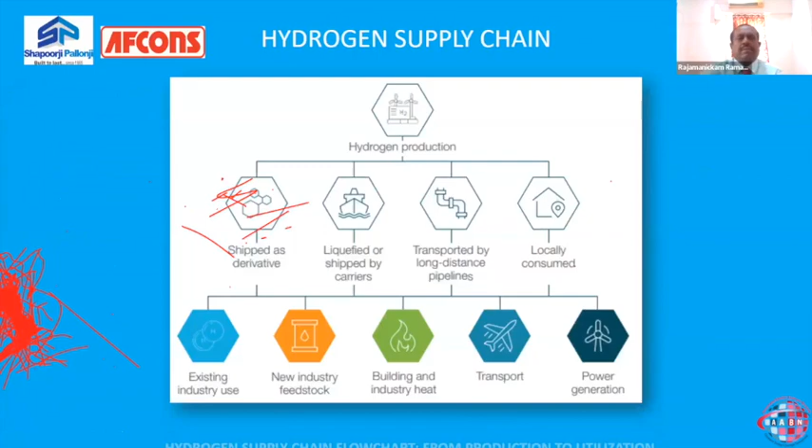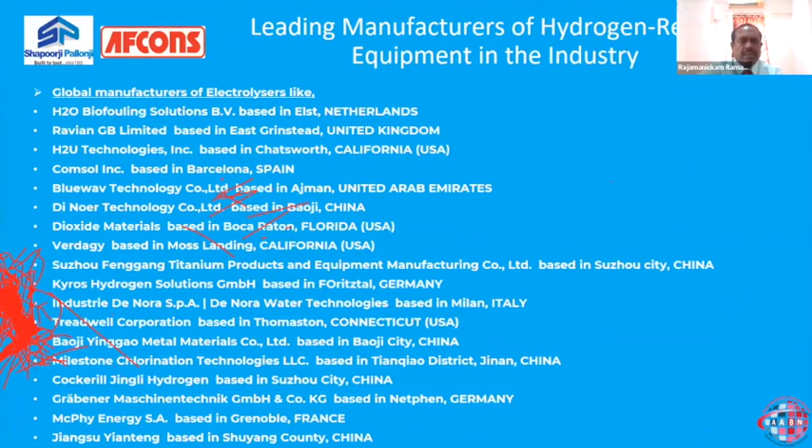Now there are many things to cover, let us go to the Indian government policy first on hydrogen. This is the Indian government's policies made for hydrogen and the initiatives they have taken positively.

India already went to the climate conference in Paris. They have signed to cooperate with the Global Climate Pact to reduce global warming temperature below 2 degrees and to achieve net zero. They want to become energy independent by 2047, and India's aim is to achieve net zero carbon footprint by 2070. This is the objective set by the Indian government - they want carbon footprint to be zero by 2070.

The carbon footprint is nothing but the amount of carbon dioxide and greenhouse gases that either an individual or an organization produces and emits into the atmosphere. This carbon footprint has to be reduced to net zero sooner for reducing global warming. So India is committed to that.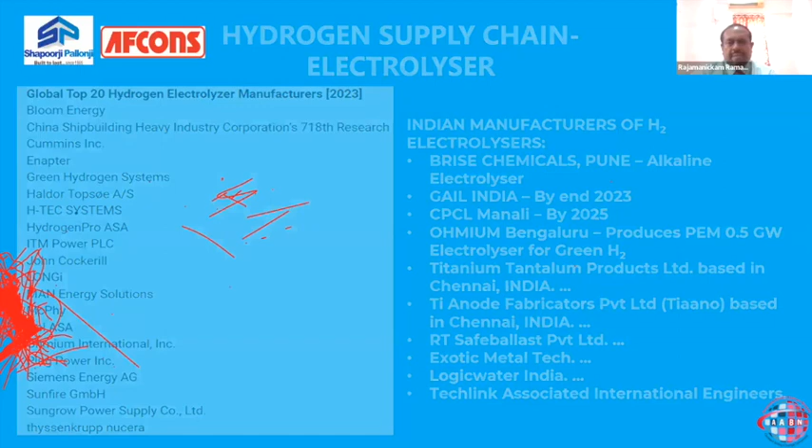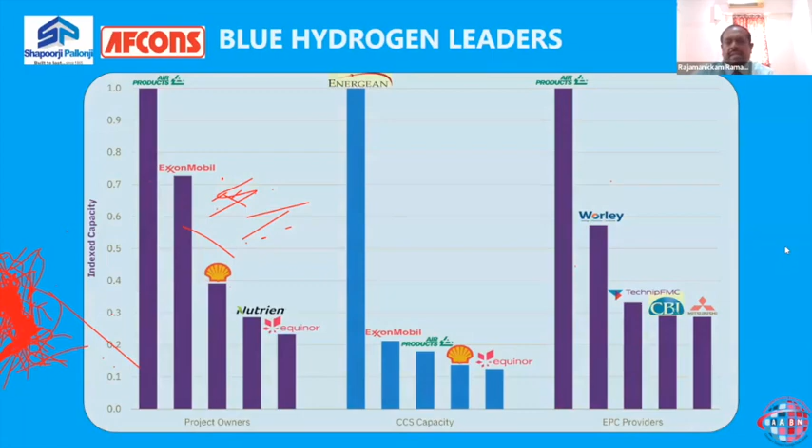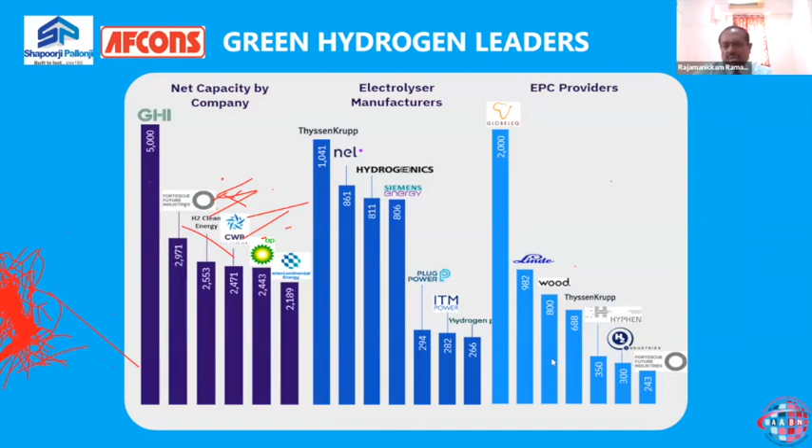And we come to the end of the presentation on hydrogen, except for a little bit on economics. Hydrogen production in India is currently high because the industry is not matured yet. It is an ongoing process by which they will reduce the cost of hydrogen when produced at mass scale. So currently the price would be higher. Roughly, per kilogram of hydrogen, green hydrogen costs 400 to 500 rupees, and the cost of blue hydrogen costs 250 to 300 rupees per kg. This is the current scenario.

But Reliance Industries, Ambani's, have agreed to relook at it, and they have promised to reduce the price of green hydrogen to one US dollar per kilogram. $1 is roughly 80 to 83 rupees per kilogram. So this is the promise of Reliance Industry in another 15 years, so by 2035 you will get it at this price. So many industrial measures are ongoing, many researches are ongoing.